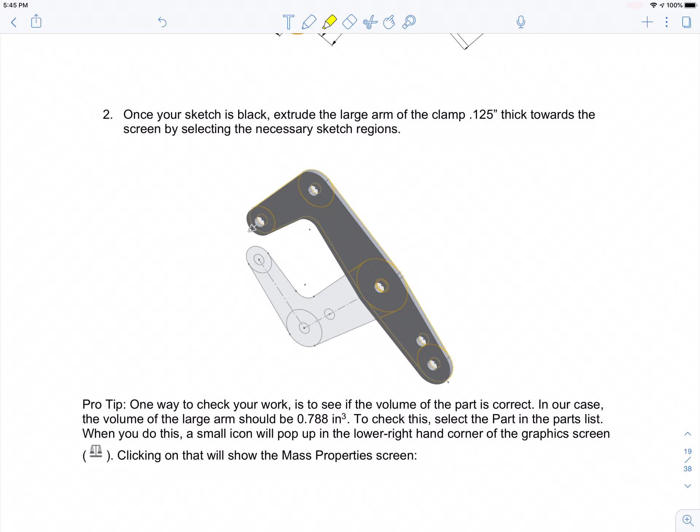Okay, now we're gonna extrude both arms, and as you see from this drawing, the extrusion is going to be toward you once we place the clamps in this direction, with the opening of the clamps to your left, meaning that it's opening in that direction.

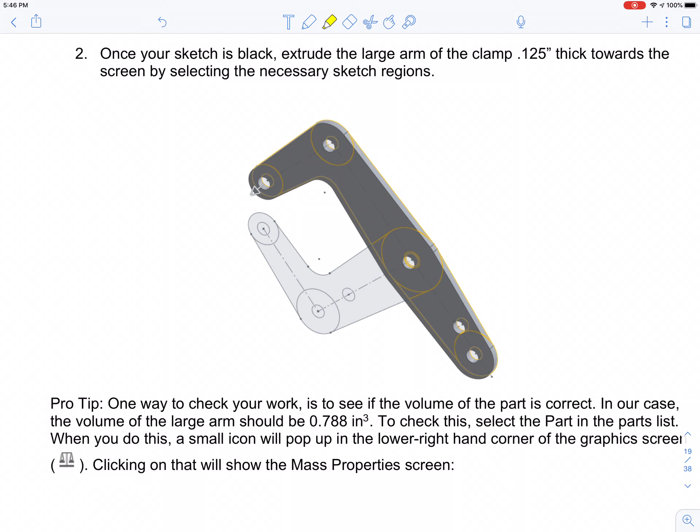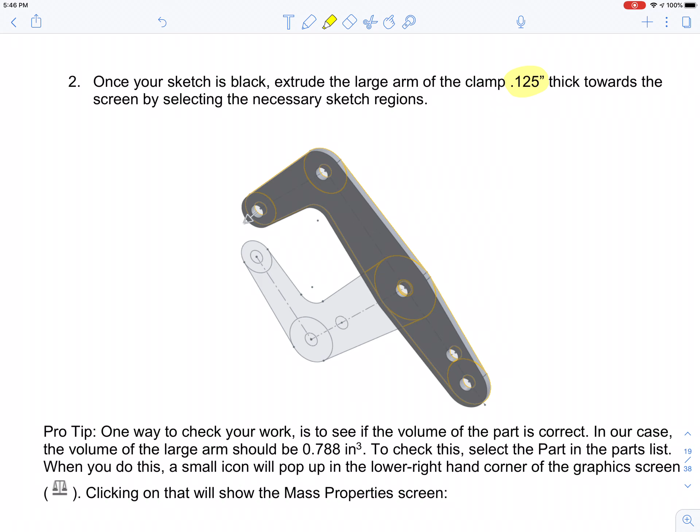And the large arm is going to be extruded toward you, the small arm is going to be extruded away from you, and the thickness of it is going to be 0.125. And we're going to check the volume of the arm as well. Alright, here we go.

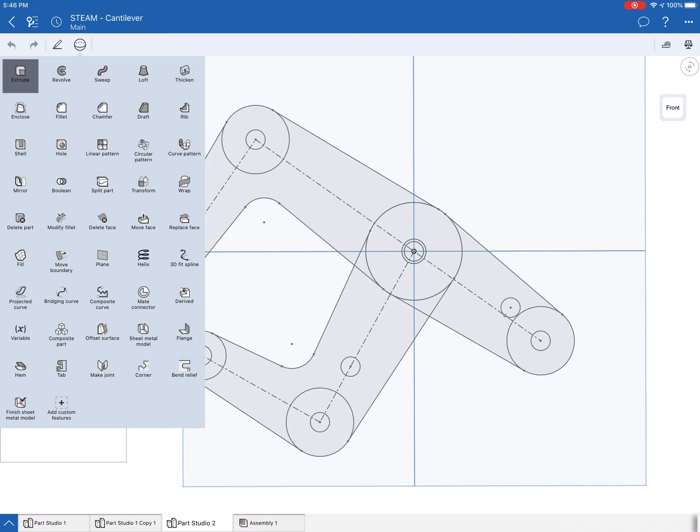Okay, so I'm going to click front. So now I'm going to click the sphere, extrude. Make sure that solid is selected and it's new. I'm going to select my entities. I'm going to select that, that, that, that.

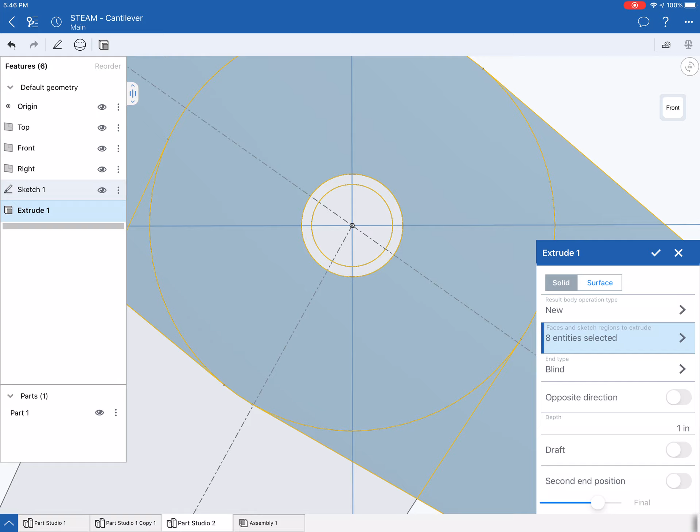Now notice how there's a ring here that's missing. You're gonna make sure that you click that as well. Okay, and those are the parts that I'm extruding. And type blind. How do I know which direction is being extruded? Well, there you go. The arrow is pointing toward you,

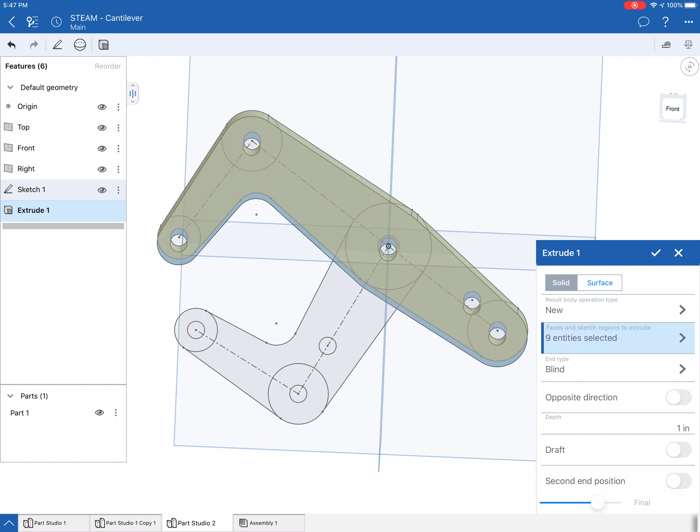and the thickness is a little bit too much, so I'm going to click on depth, and I'm going to put 0.125, and just to double check, I'm going to click on that, 0.125. Okay, check, and we are done with that one.

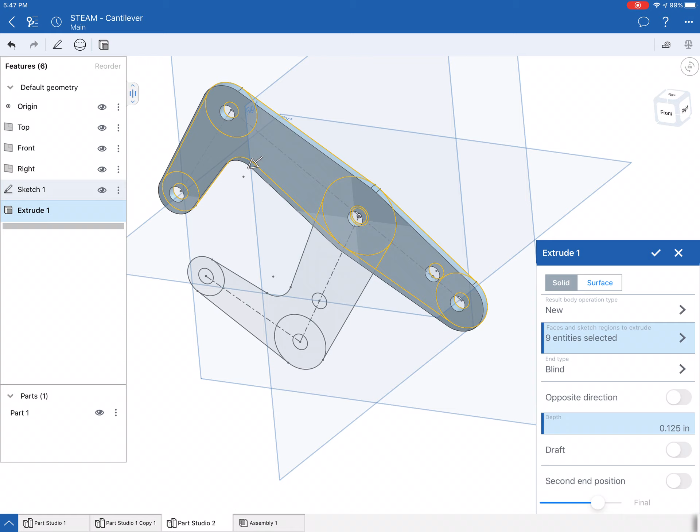Okay, and you see the other arm disappeared, but never fear. If you look at the features menu, sketch, the eye has been crossed out, so it's hidden. So I'm going to unhide it.

Again, what I'm gonna do now is I'm going to flip this toward the other side. So I'm going to make sure that the opening is facing to my right instead of to my left. So I'm gonna do this. And the reason I want to do that is because there are parts of the small arm that are blocked out by the large arm.

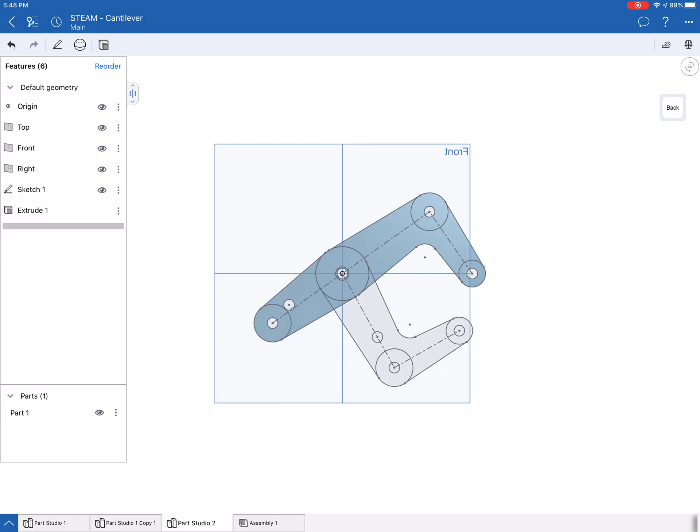Now, I'm going to click back. So now it's the back side. Again, I'm going to extrude. Now I'm going to click all the parts that I want to extrude. I want to click that, that, that, and big circle. These two spaces in between. And again, I'm going to click on that ring.

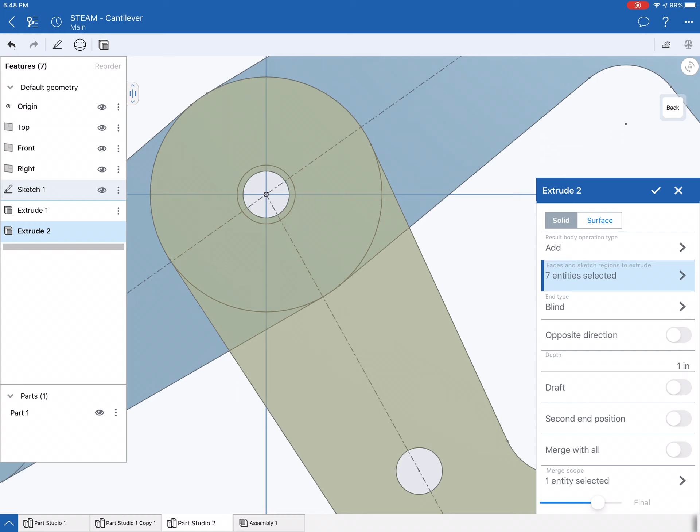Okay, and if you want to check, just tilt your drawing a little bit. See, it's being extruded in the wrong direction. So I have two options. I can click on the arrow, or I can click right where you see the arrow, which is the other option, opposite direction. Either of them is going to work the same.

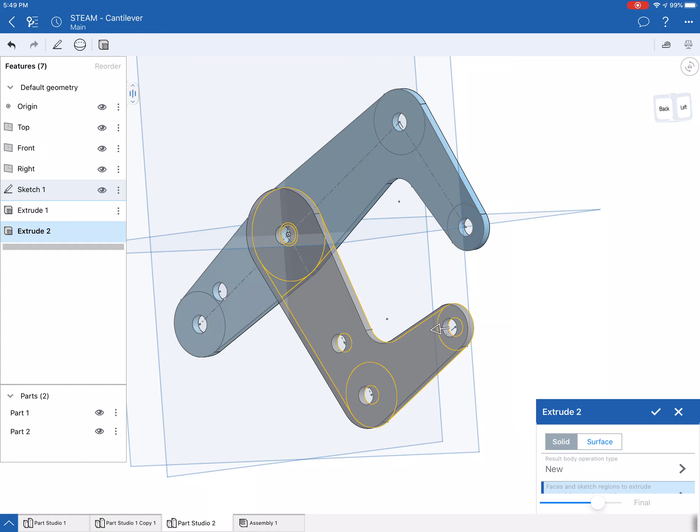And I click opposite direction, and now I'm going to make my thickness 0.125. And I'm done. Oh, one more thing. Over here in the first option, right underneath solid, where it says result body operation type, you have to make sure you click new. And now we're done. Now we have two separate arms. Just what I need.